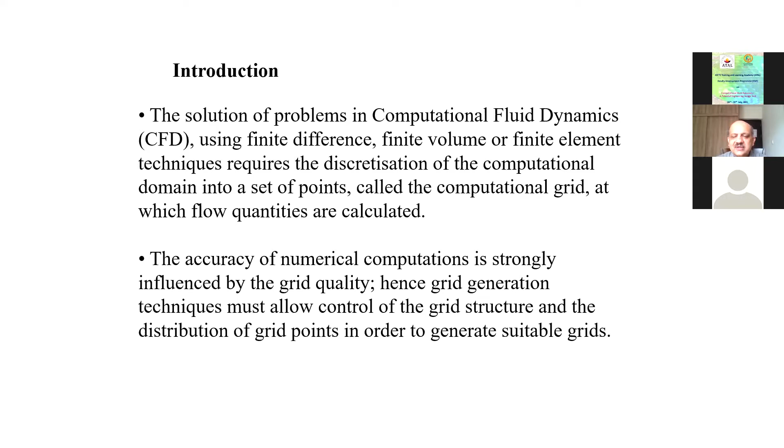All of these techniques require the computational domain to be discretized into a set of points. This is called the computational grid, and these are the points at which the flow quantities are calculated. Now, the accuracy of your computation is dependent very strongly on the grid quality. So whatever techniques you have for grid generation must allow you to control the grid structure and the distribution of grid points so that you can get the sort of grid that you need for the type of solution that you are seeking.

There are two main categories of computational grids. One are body conforming grids, where the grid lines will not cross the boundary. So if you have an airfoil or an aircraft, the grid lines will be conforming to that boundary and will not cross it. The other category is called non-aligned or Cartesian grids, where you allow the grid lines to cross the boundary. There are advantages and disadvantages in both these methods.

Where you have body conforming grids, it is very easy to apply the boundary condition. If you have Cartesian or non-aligned grids, the boundary condition application is a bit difficult, but the grid generation part is easy. So it's a trade-off whether you want to have easier boundary conditions or easier grid generation.

Another category is called overlap grids, where if you have multiple components, you generate different grids and then the grids will overlap. Then you need some sort of interpolation, because since they are not the same grid, the flow values will have to be interpolated. This method is sometimes used when the grid generation becomes very difficult. But generally, the techniques used for interpolation make it not that accurate.

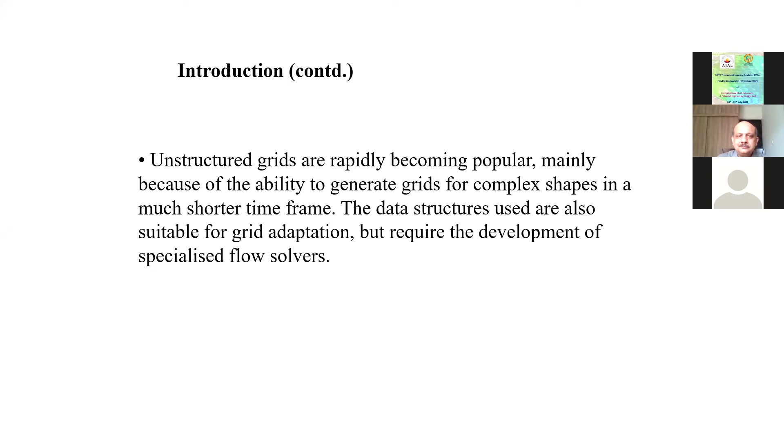So grid adaptation is a method by which you concentrate grid points in regions of high flow gradients. So wherever there is a high flow gradient, you need points to be close so you can pick up those gradients. And it is difficult to have a very, very fine grid in the entire domain because your grid size will become not possible to handle. It will be too big. So you would like a grid method by which you can move points where needed and have a sparse grid where there is not much happening.

So for grid adaptation, again, there are two main techniques. One is called point movement, where you will move the grid points towards the region where you want to concentrate them. And the other is called point enrichment, where you will actually add grid points where you need them. And the way structured and unstructured grids are done, if you have a structured grid, it is easier to do mesh movement. Whereas if you have an unstructured grid, it is easier to do mesh enrichment.

So some thoughts on grid generation. See, grid generation is not the final goal. It is an intermediate stage. In the entire flow simulation process, it is one of the stages. And ideally, it should be very fast, it should be automatic and it should require minimal user intervention. However, experience shows that if you have a very complex three-dimensional geometry, the grid generation takes a disproportionate amount of time. A lot of time is spent on the grid before you can actually do the flow solution.

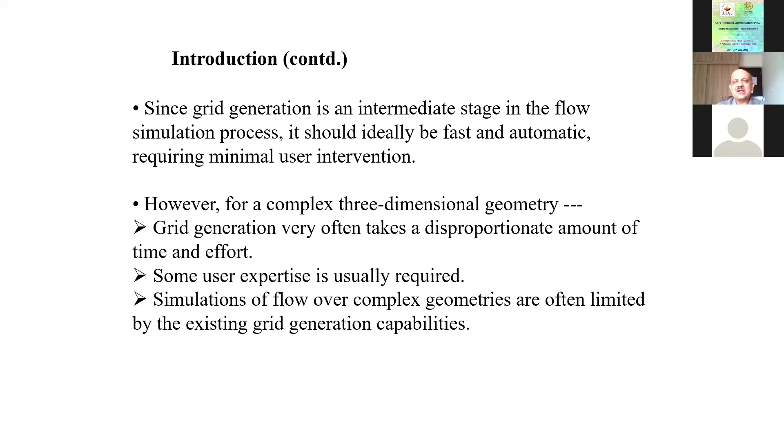And some amount of user expertise is required because it's very difficult to get a perfect grid the first time. And it will require a lot of experience to handle the sort of grid that you need for the sort of flow you're computing. And even now, with all the tools at our command, for very complex geometries the grid generation facility becomes the bottleneck. The solver is capable of doing that problem, but you have a problem in getting the grid done.

So we need software which does fast and automatic and can be used by non-experts. So a lot of packages are available now which are being routinely used across the CFD community. But a word of caution that despite all these packages, you would still need a fair amount of experience before you can use them effectively and use all the capabilities that there are in those packages.

So after that sort of basic introduction about grid generation, I will start discussing structured grid generation. So as I said, there are two main categories for generating structured grids. One is the PDE methods, in which you actually solve a system of partial differential equations to generate the grid. Okay, so here it is a numerical method in which equations are solved to generate the grid. Then you have algebraic methods, which use some sort of an interpolation function to generate the grid lines from the coordinates that you have specified on the boundaries of the domain.

So you will have a computational domain. You will have boundaries on that domain. On that domain boundary, you have to specify some grid points. Based on those grid points, either the PDE methods or the algebraic methods will generate the grid within the interior of the domain. So let us look at some of these methods in a bit more detail.

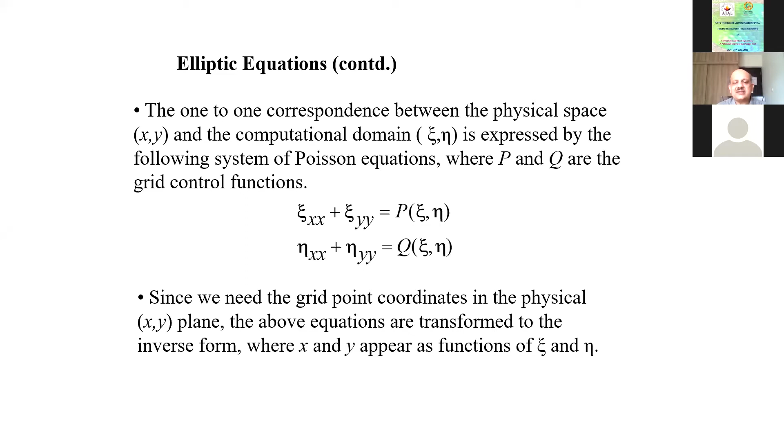So we can start with these Poisson equations, xi xx plus xi yy, and on the right hand side we have what we call the grid control functions. Now what we are trying to do is get the grid. So we are solving for x and y. We are not solving for xi and eta. So we transform these equations so that we solve for x and y. So you will get this set of equations where it's explained what are A, B, C; J is the Jacobian. And these set of equations have to be now solved by a numerical method.

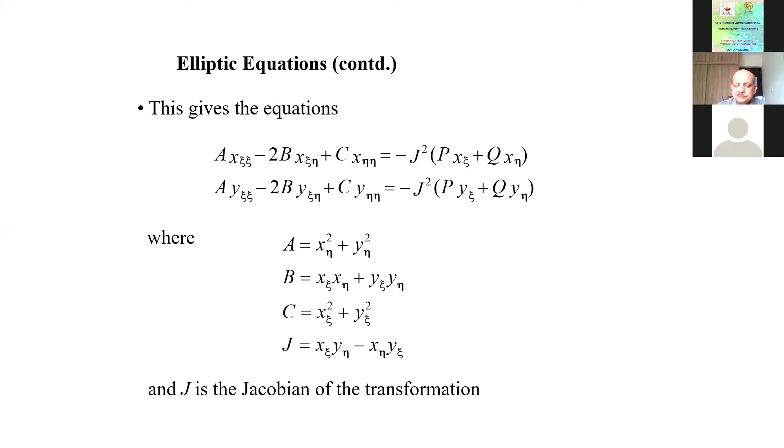And appropriate boundary conditions. So these being elliptic equations, you need to specify the boundary conditions on the entire boundary and solve for the interior points. So we can write in a more general form where R represents the x and the y coordinates. And this is the equation. Now, this can be solved very easily using central difference discretization. So these being second order derivatives, you can use central difference discretization for the derivatives and use a standard scheme like successive over relaxation scheme to solve the equations.

And if you look at the numerical methods, there are things called approximate factorization and similar schemes, which will make it more efficient to solve the problem. Now, the grid control functions are used to control the grid point spacing as well as the angle of intersection of the grid lines. So I'll try to demonstrate how these grid control...

Hello. Hello. Is it audible, sir? Hello. Sir, are we audible? Sir, I think... Sir, just wait, sir. I think you have been muted. Yeah. Hello? Sir, now it's okay, sir. Please. Okay, yeah.

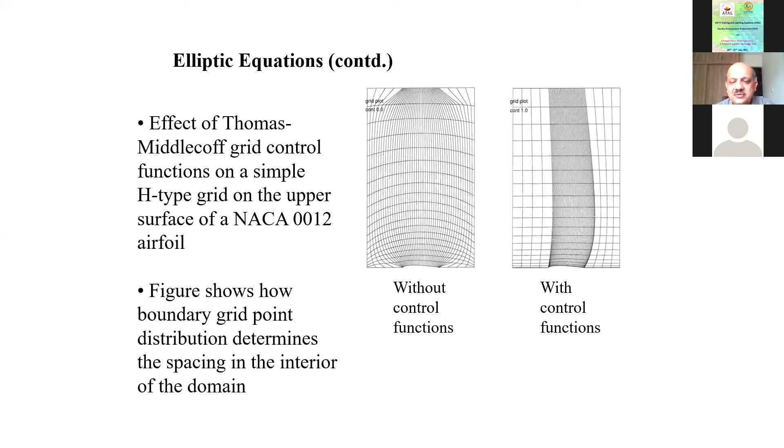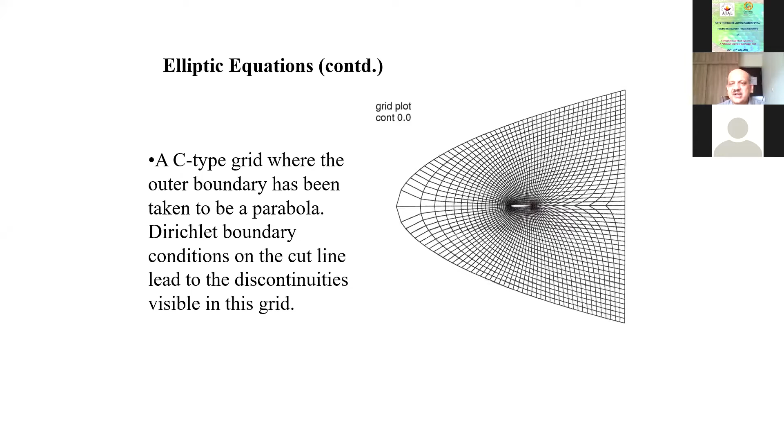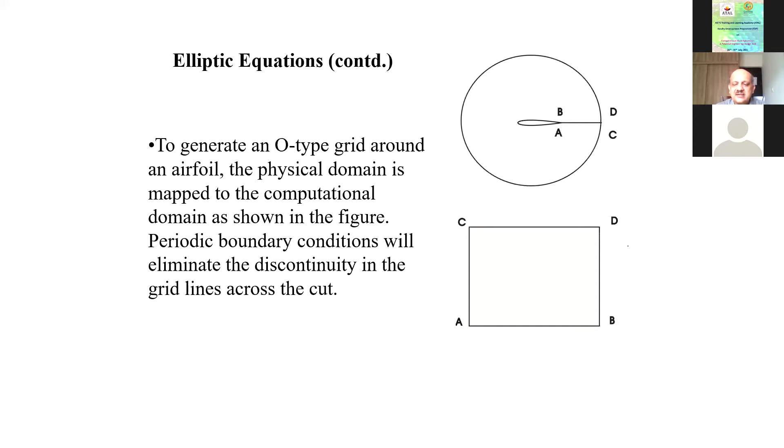Now we will look at another type of grid. Suppose you want to generate an O-type grid around an airfoil, then this is the sort of computational domain you will have. A to B is on the surface of the airfoil, then B to D and A to C are on the cut line, and then D to C is on the outer boundary. So if you generate this grid and map it back to the physical domain, you will get this kind of grid, which is an O-type grid. And here we have put periodic boundary conditions on the cut line. So it is a very smooth grid.

Again, the effect of the control functions is shown here. The left side is elliptic equations without the control functions. The right side is with the control functions, Thomas-Middlecoff control functions. And you can see that in the right side grid, there is a clustering of the grid lines near the airfoil, whereas on the left side grid, the grid lines are spaced far away from the airfoil. So this is the sort of control that you can have with control functions. And this is just one example. There are many control functions available in literature which do a variety of control tasks.

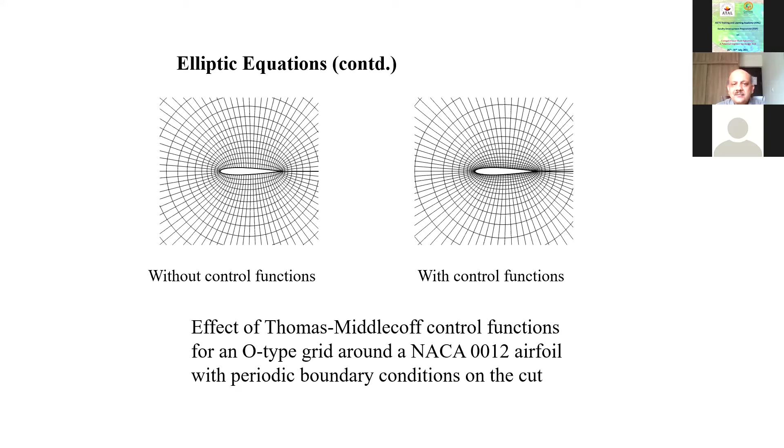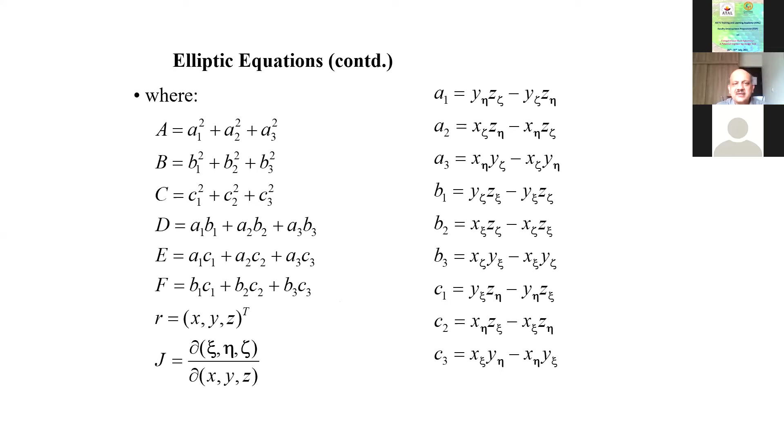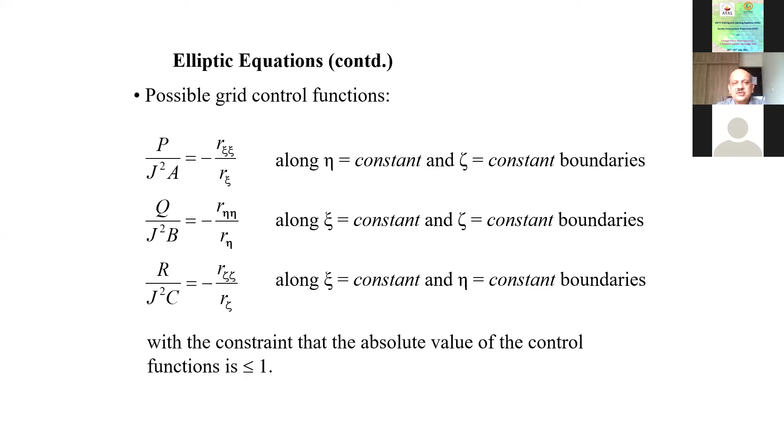So this elliptic equation method can be easily done in 3 dimensions also. So you will have the 3-dimensional Poisson equations. Again, you can write it in the form that I've shown there, where R is the X, Y, and Z coordinates. And these are the expressions for all the other constants shown there. In a similar way, you can solve these equations for X, Y, and Z in 3 dimensions and get a 3-dimensional grid. And again, I have suggested some grid control functions given in literature which you can use for controlling your grid points. So that is elliptic equations.

Now I'm going to describe one other method of structured grid generation, which is called the conformal mapping method. Conformal mapping can be used for grid generation, but for very specific types of geometries, because there the complex domain is mapped mathematically into a simple domain. You can generate a grid in the simple domain and map it back to the actual domain, and you get the grid. So one example that I'm showing here generates a very good quality O-type grid around an airfoil.

People who are familiar with aerodynamics will recall that there's something called a Joukowski mapping, which maps a circle in one domain into an airfoil in the other. So you go from a circle in the zeta plane into an airfoil in the Z plane. And this Joukowski mapping gives you an airfoil with a cusp trailing edge, which means that the angle at the trailing edge is 0. It is like going into a straight line. So this mapping can be written in the form that I have given below.

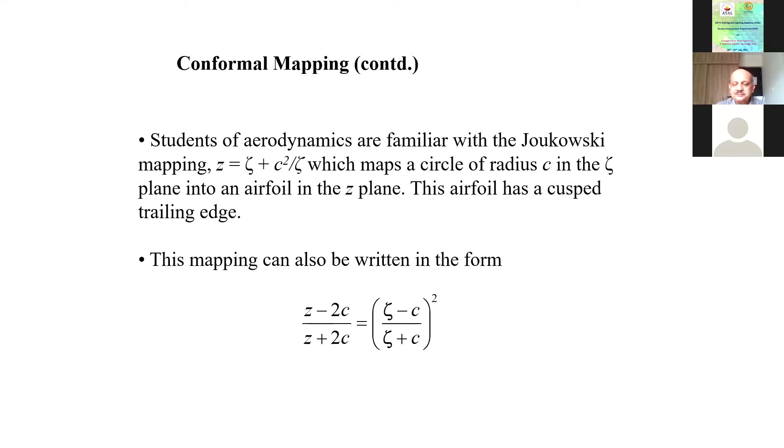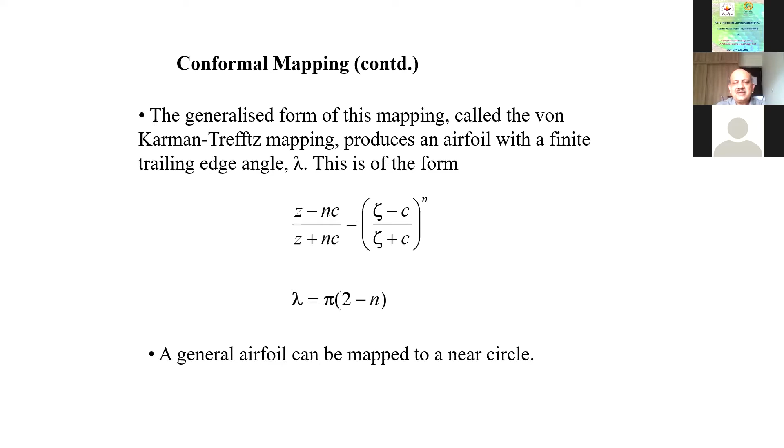And there is a generalized form of this mapping, which is called the von Karman-Trefftz mapping. And this gives you an airfoil with a finite trailing edge angle of lambda. And this is the form in which this mapping is given. So using this mapping, you can take any general airfoil and map it to a near circle.

And this can be used for very specialized geometries. So the disadvantage is that this is not a very general method. It cannot be easily extended to 3 dimensions. And earlier in the history of grid generation, they were used for some complex shapes, but now because other methods have taken over, these are not very common. And different mappings can be used for different types of geometries.

Then we have algebraic methods, which are computationally very fast, and they allow very precise control of the grid point spacing. The disadvantage of algebraic methods is that sometimes the grid is not inherently smooth and it can have discontinuities. And in general, algebraic methods involve some sort of interpolation between points on opposite boundaries. So you will have to define your computational domain. You define the boundary points, what are the coordinates, and then you do some sort of an interpolation to get the grid in between.

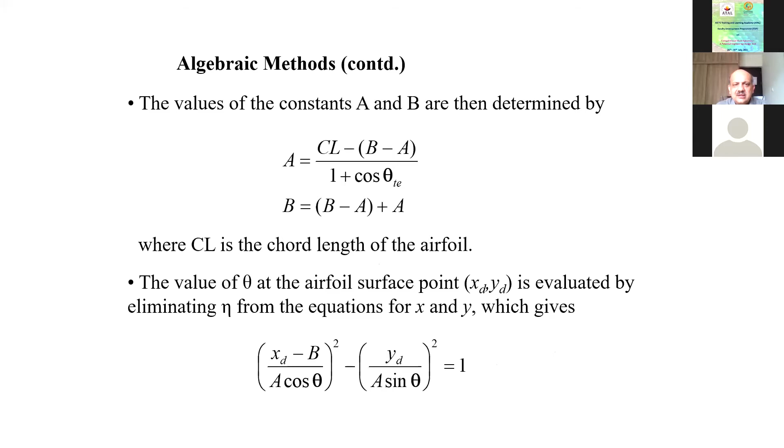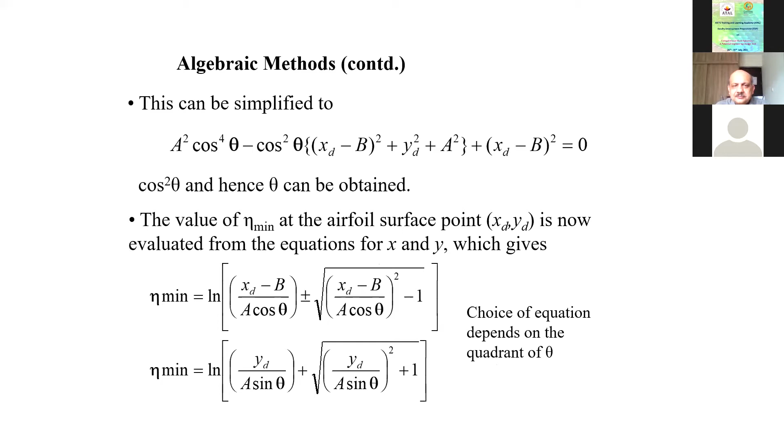You can algebraically see that you can get the values of these constants where you have the chord length, and then you will get the value of theta, which is given here. So after you do all this algebraic work, you can derive these equations for eta min and the airfoil surface, and for x and y. So eta max you will get at the point of intersection of the hyperbola and some far field boundary.

Then you have to do a distribution of eta between the minimum and maximum. This will give you the points from the airfoil to the outer boundary. And the way you do this distribution gives you your control of the grid points. So if you are doing a viscous calculation, then you can do this eta distribution such that you get clustering near the airfoil where you have your boundary layers, and you can let it spread as it goes towards the outer boundary.

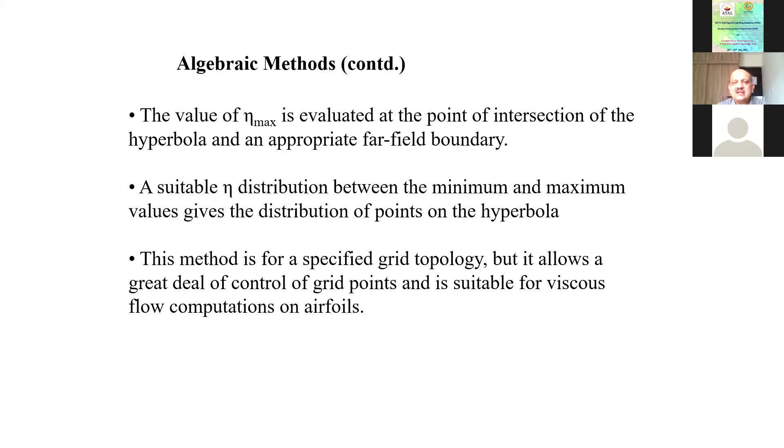So this sort of an algebraic method, once you get it to work, it is very, very fast, and it can give you a very good quality grid for specific geometries.

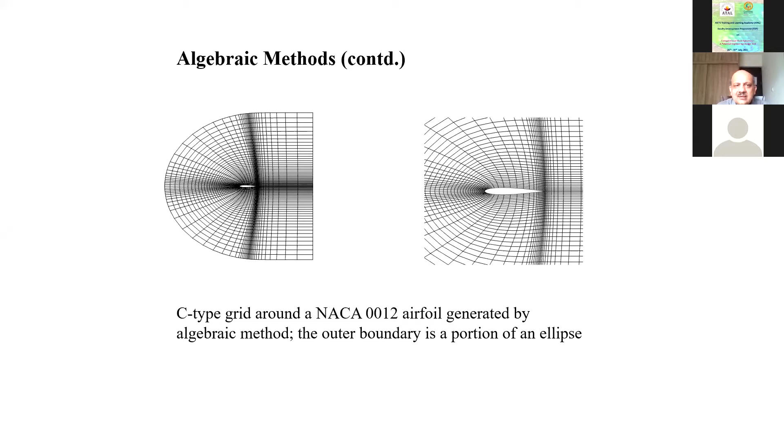There is one more method which is slightly more general than what I have described earlier, which is called transfinite interpolation. So this again is just interpolation between the boundary data from one boundary to the other. So again, if you represent the boundaries by eta equal to 0 and 1 and xi equal to 0 and 1, then you can define these interpolation functions along those lines. And if you add this up, you will get the sum of these two expressions, which is this interpolant.

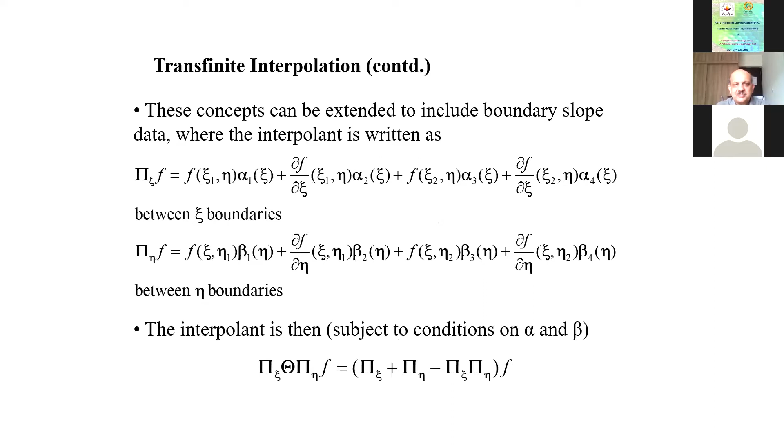Now, transfinite interpolation methods, you can extend it so that the boundary slope data can also be taken into account. And I have just given this here, how you can include the boundary slope data and then get a function for the interpolation. And there will be some conditions on the alpha and beta. And this method is also possible to extend to 3 dimensions.

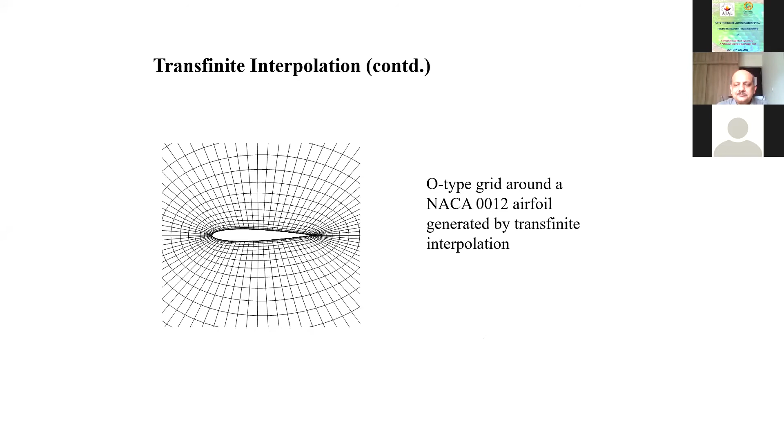So most of the examples I've shown you so far are 2D. Now, in real life, you have to actually do 3D configurations. And there are many 3-dimensional solvers for structured grids. And many of our organizations have concentrated on structured grid generation. However, before you go to full 3D grid generation, there are some techniques that can be used for relatively simpler geometries. One method is called the grid stacking method, which I will explain.

So if you have a simple shape like a wing, then you can generate a 3D grid by essentially generating 2D grids at the sections and stacking these grids together and getting a 3D grid. Now the sectional grid can be generated by either algebraic methods or elliptic methods, or combining the two methods. And grid stacking method, if you take care, you can also extend it to more complex geometries.

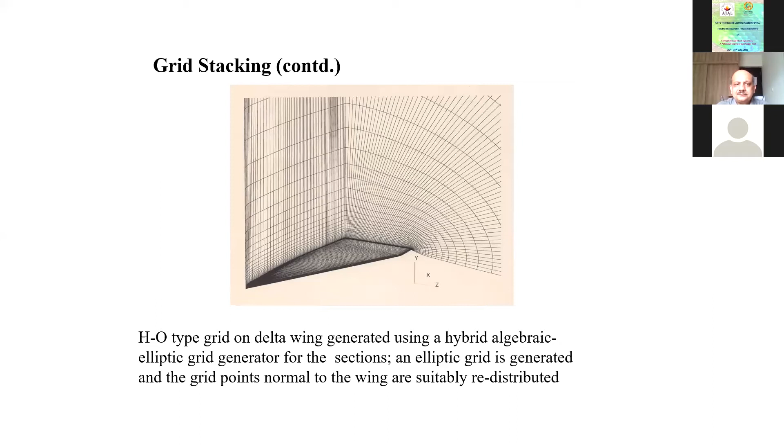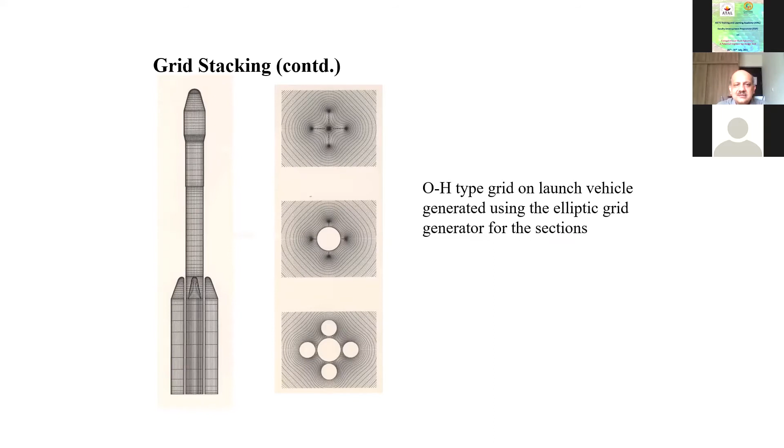Similarly, for a slightly more complex launch vehicle configuration, you can see that there are essentially 5 bodies, which then go to 1 body and 4 singularities, and finally to 5 singularities upstream of the body. So this grid stacking, of course, cannot be used for aircraft-like shapes, because you will not have the grid quality that you need. So you need to do what is called 3-dimensional multi-block grid generation.

What is multi-block grid generation? So what we are doing here is that in any grid generation technique, you are essentially mapping the physical domain to either a rectangle in 2D or a cube in 3D. And if you have a very complex body, it is difficult to do this.

So we break the domain, the physical domain, into a number of blocks. And a simple grid is generated in each of these blocks, and you map it back to the physical domain. And the way you distribute these blocks, the way they are connected to each other, determines your grid connectivity. However, to use a multi-block code, you need to have a flow code which can handle multi-block grids.

Multi-block grid generation involves essentially the following steps. First, you have to arrange your grid blocks. So this will be based on geometry, flow features, some amount of experience that you have, and the sort of flow solver you're using. And adjacent to the surface, the way you arrange your blocks, you will get the surface grid. Then you have to create a grid on all the block faces.

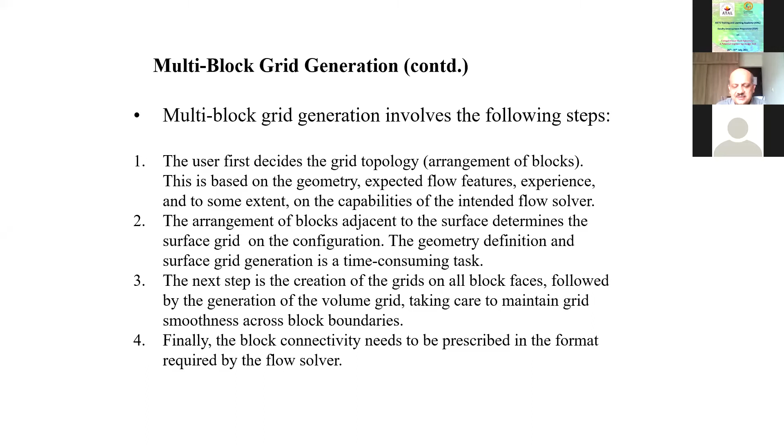Then you have to generate a volume grid inside each of the blocks, and then define the block connectivity in the way that the flow solver requires. So to make multi-block grid generation easier, a combination of elliptic and algebraic methods are normally used. So in each block, you will first do an initial grid, which is algebraic, using something like transfinite interpolation. And then you smooth this grid using the elliptic equations and control functions as required.

So nowadays, many commercial packages are available, and many of them are user-friendly. In NAL, we use something from Pointwise, which was earlier called GridGen. And this has a graphic interface, which allows you to visually create the blocks and get intersections of the components, control the grid points, generate a quick initial grid.

Then you can check within each block whether there are any negative volumes which are caused by grid lines crossing or skewed cells. And then you can do some grid smoothing and then assemble the blocks in the order that you wish. So this sort of a package makes it much easier to do multi-block grids, with many options for smoothing, many options for assessing grid quality. So these things are required if you want to use software.

Now I'll just show a couple of examples. This is a 2D example where you have a 3-element airfoil. And in order to generate the grid around the airfoil, you can see that different blocks have been formed. There is one block around the main airfoil. There is one block around the second airfoil. There is a third block. So you can generate these different blocks. And within each block, you can generate an independent grid and make sure that your connectivity of the blocks is defined properly, and your flow solving software can handle such a grid.

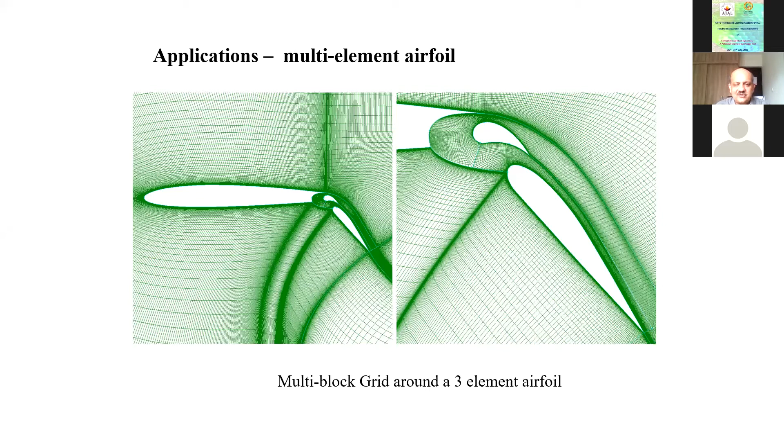Similarly, if you want to go for 3D, this was one in-house code that we had developed at NAL. So we used a 30-block grid with so many grid points. And this is for a half aircraft configuration. So you can see the way the grid points are distributed. Those represent the different blocks and the different block faces that have been used.

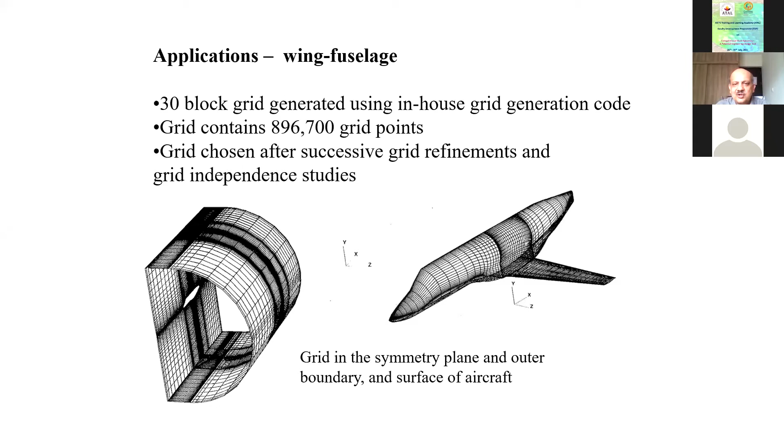So another geometry here where in addition to the wing fuselage, we added a stub wing. And then again, the number of blocks increased. And we used a constraint that one block face can only connect to another block face fully. That is, there is no partial connection of the block faces. Now, if you use that constraint, your number of blocks begins to increase very rapidly. So we went from 30 blocks to 64 blocks for this addition of one small component.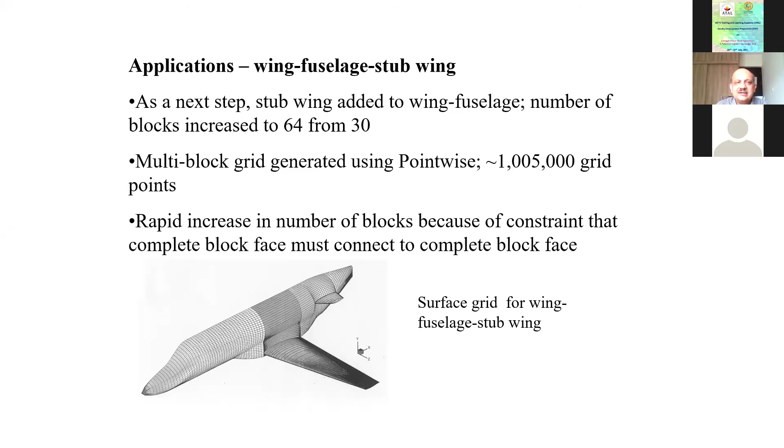Then we realized that this strategy is not very useful. So we made a strategy in which a block face can connect to a portion of an adjacent block face. So this makes the connectivity more complicated, but it makes the grid generation easier. So for this sort of an aircraft configuration, you can do a 33-block grid.

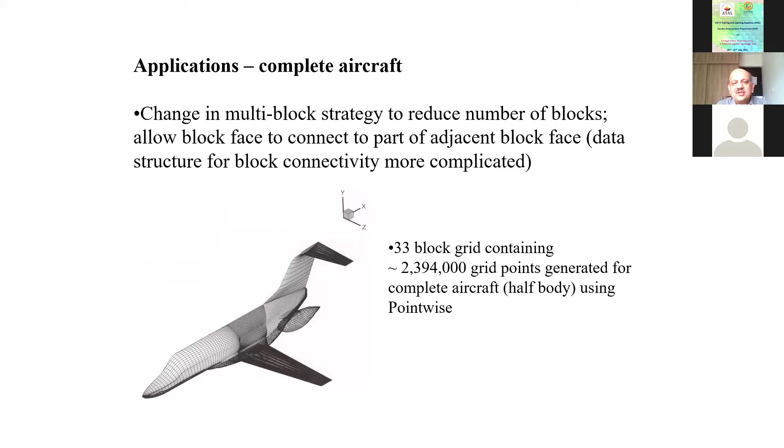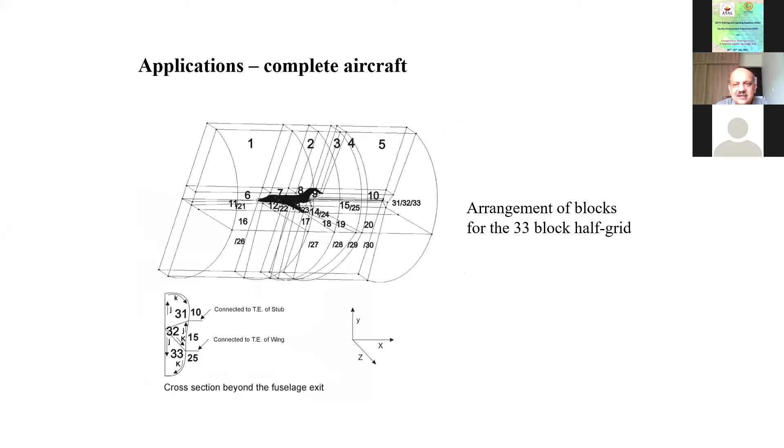Just to illustrate how complex it sometimes gets, this is how the blocks are arranged in this 33-block grid for the half aircraft. And this is something that you have to do yourself: decide what are the blocks, each block goes from where to where, what is the domain, and how it connects to the other block, cross-section wise and all that. This connectivity has to be done very carefully.

So this is just to show at different cross-sections how the blocks will be connected. You have to make sure your IJK coordinate directions are correct. You have to make sure you have a right-handed coordinate system everywhere, how the blocks are connected, because in the flow solver, these blocks have to communicate with each other as you solve the problem.

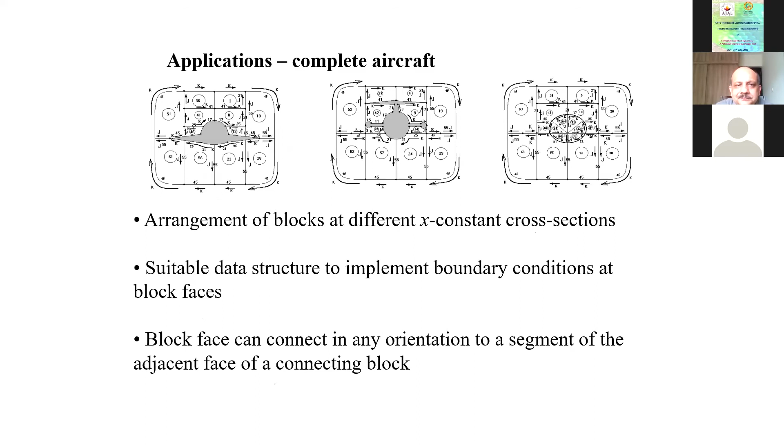This again is using the commercial package for an aircraft half-body configuration, how you would generate a structured multi-block grid. So as you can see, it is possible for fairly complex configurations to be gridded using the multi-block method, but it will take time. It takes a bit of experience in understanding how this should be done.

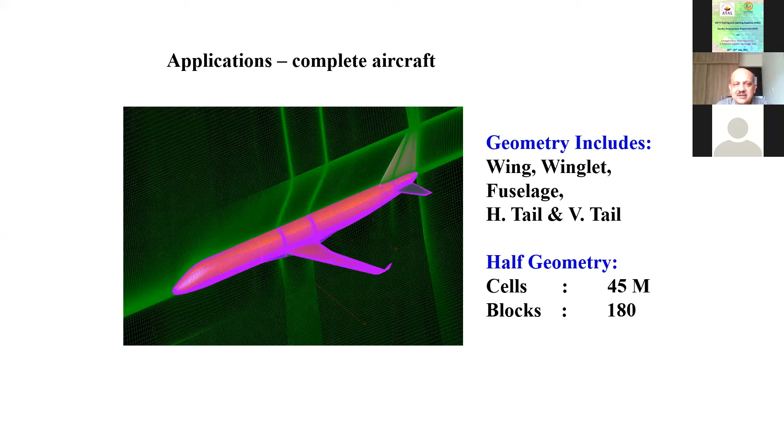And it is a process that, if you change the geometry, you have to repeat. So the grid generation takes quite a bit of time in this method. Now, having talked for a long time about structured grids, I would like to go into unstructured grids.

Hello? Audible? Yes, sir. Audible, sir. Okay.

So fundamentally, if you look at any grid, it consists of a set of grid points, and these grid points are connected to each other in some manner. Now, when you have a structured grid, this connectivity is not explicitly defined. So you store the points in a matrix in such a manner that the points in the matrix are the neighboring points, and that explains how these points are connected to each other.

However, when you talk about an unstructured grid, this connectivity has to be explicitly defined. So a structured grid can always be represented as an unstructured grid, but it is not true the other way.

Okay, I'll again have to reshare, 1 minute. It doesn't move. Stop share. I don't go to the slideshow. I go to the PowerPoint. That's the problem. Grids. Current slide.

Okay, so let me explain how this is done. Let's look at a very simple grid. We have a 3x3 structured grid. So there are 9 points, and we store the x and y values in 2 arrays: x(i,j), y(i,j), and i and j vary from 1 to 3. So in these 2 arrays, I can contain x and y values of all the 9 points in the grid.

And I know that point (1,1) connects to point (1,2) and so on. I don't need to explain how it is connected. But if we want to represent the same as an unstructured grid, then what we do is we number the points from 1 to 9 and store their x and y values in arrays x(i), y(i), going from 1 to 9. And then we have to define a connectivity matrix.

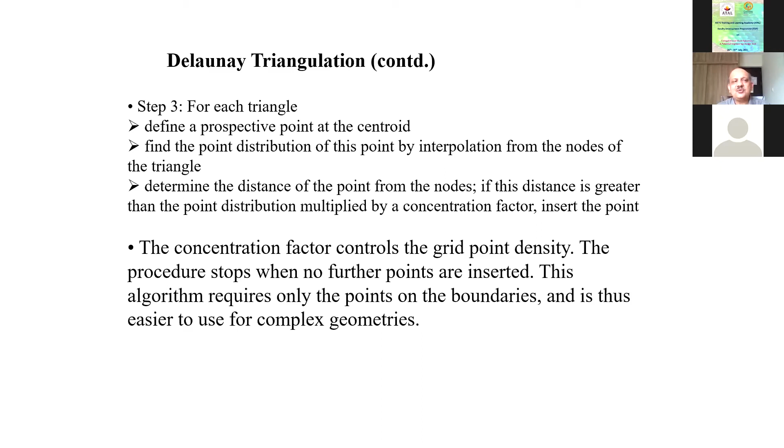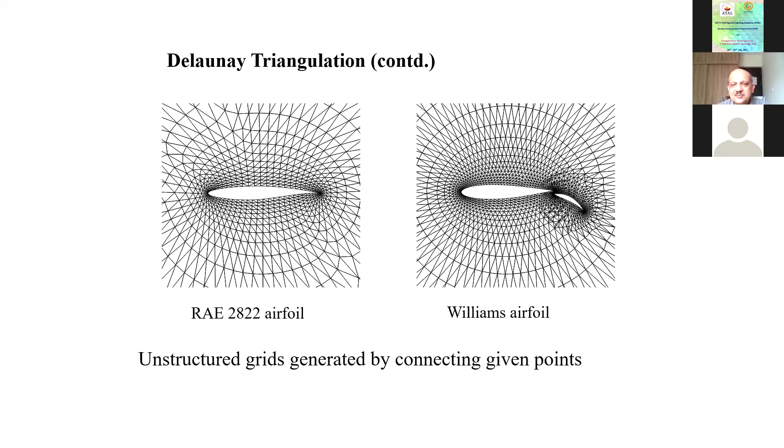The second is a 2-element airfoil, where again you can see that around the main airfoil there is something like an O-type grid generated. Then around the second flap there is a smaller O-type grid generated, and these two point sets have been put together and then triangulated. So again you can see some sort of a background structure, although these are unstructured grids.

Now these are grids which have been generated using the point creation method. So this is what we think of when we see an unstructured grid. The first one is showing a single airfoil, and you can see now that there is a clustering of the points in the vicinity of the airfoil, especially around the leading edge and the trailing edge. And then as you move away from the body, the size of the cells increases. So this is the sort of control that you want, that near the airfoil you have a clustering of points, and as you move away from the airfoil, the points can be sparse and the grid size can be increased.

So this is how you can generate very quickly unstructured grids for very complex shapes based on the boundary point distribution. Now here I have not shown the outer boundary, but the outer boundary is fairly far away. It might be some 30 to 40 chord lengths away. And the point distribution on the outer boundary will be very sparse. So as you move away from the airfoil, you will find that the grid cells become larger and the number of points becomes less.

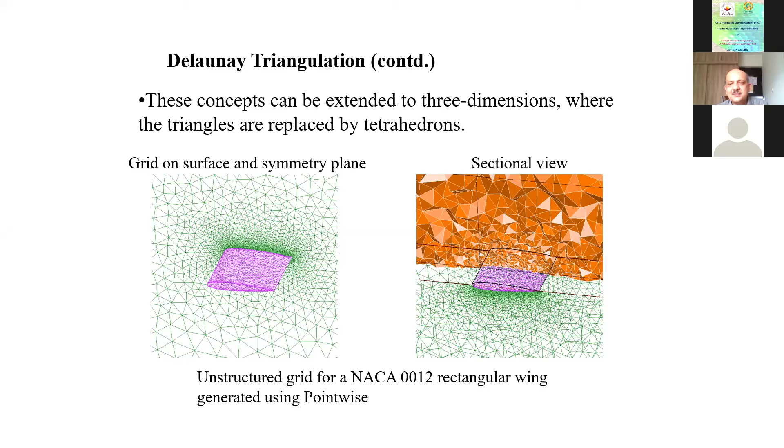So this was some idea about unstructured grid generation. Now, I would like to give a little bit of time to what is called grid adaptation. Now, what we mean by grid adaptation is that, as I explained right in the beginning, in your solution, there will be regions where there are large flow gradients, where you need to have more grid points. And then there are regions where not much is happening. The flow is fairly calm. So you do not need to have a large number of grid points to resolve that flow.

Now, generally, when you solve a problem, you are not aware of where this is going to happen. You have some idea. Based on that idea, you will distribute your boundary points. But if there is something happening within the domain, at the beginning of the flow solution, you do not know what that is. So you have to do some sort of grid adaptation, because it is not possible to do a very, very fine grid in the entire domain. You will have millions of grid points and it will take a huge amount of time to solve that problem. Plus, you are overkill in many regions because essentially nothing is happening and you've got a large number of points there.

So grid adaptation is a method by which there is some interaction between the grid and the solution on that grid. So it is 2 steps. It means you take an initial grid and generate a solution. Then in that solution, you identify regions where the grid may be inadequate and you need to add points. Then you need to adapt the grid in those regions and again solve. So it is a process where you move between the flow solver and the grid and do the adaptation to suit the solution.

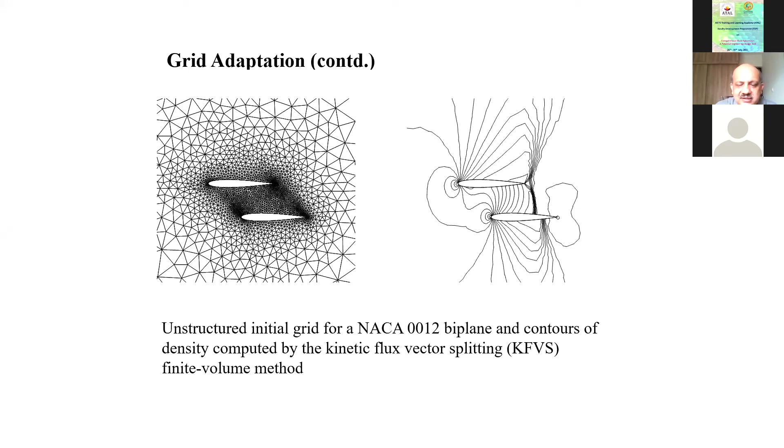So what has been done here is that based on the initial solution, the density gradient at each edge has been evaluated. And then based on that density gradient, the flow solver decides whether that has to be adapted or not. So the gradients will be high in the initial nose region of the airfoil and in the shockwave region.

So now if you look at the refined grid, you see that in the region of the shock, a large number of points are added. And now if you look at the solution, you will see that the flow pattern, the shock pattern is captured much better. In fact, the upper airfoil at the back, you can very clearly see a triangular shock pattern that has been captured. And this has been done using grid refinement.

So here, as I explained, an initial grid generated using Delaunay triangulation. Based on that initial grid, you have generated a solution. Based on that solution and the adaptation criterion, you adapted the grid, done some grid smoothing, and regenerated a solution, which is capturing those shocks better and is a more accurate solution.

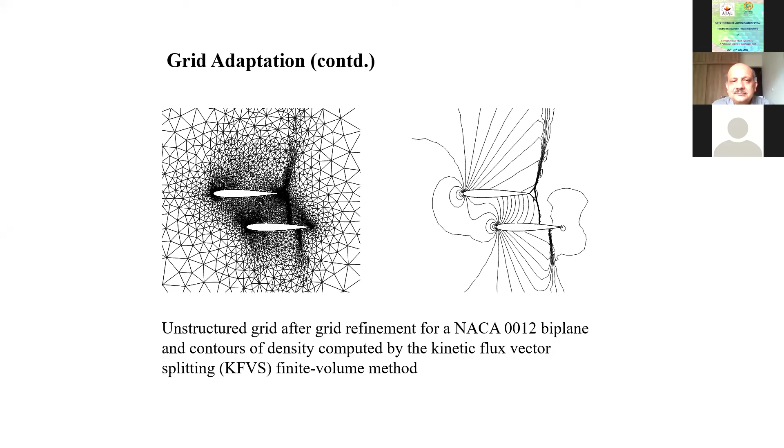So with that, I think I'm coming to the end of my talk. So what I have tried to do in this lecture is try to give you some ideas of the different methods that can be used for grid generation. Now, numerical grid generation itself is a major field, and this is only a very brief introduction to the subject. So that is meant to give you an idea of what you should read. So I am hoping that whoever is participating in this course, you will get some motivation to refer to further material on the subject.

One thing that I will add is that now there are so many grid generation packages, commercial packages that are available, that very few people will actually need to write a grid generator of their own. They will tend to use these packages, which sometimes come bundled with the flow solver software also. But I feel that if you are going to use these packages effectively, then you should understand the methodology that is being used to generate those grids. And if you understand what you're doing, you'll be able to more effectively use these packages and get good solutions for your grid generation problems.